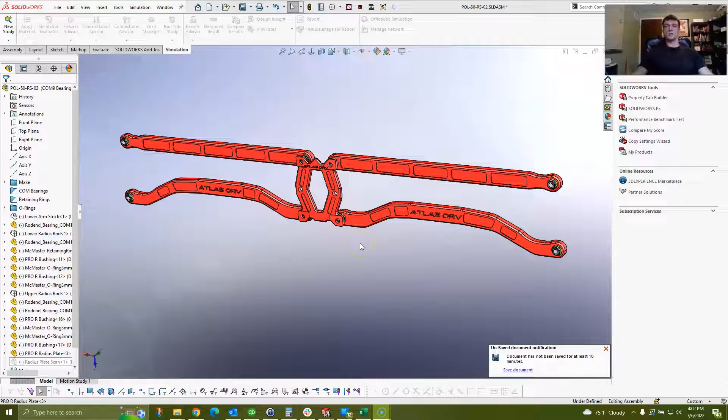Hello, my name is Calvin with Atlas ORV, and in this video I'm going to go over a little bit more about the design process and focus in a little bit more on an area that has some issues, because you have to get kind of thin to fit a larger bearing into the arm and then also fit that arm into the bearing carrier on the machine.

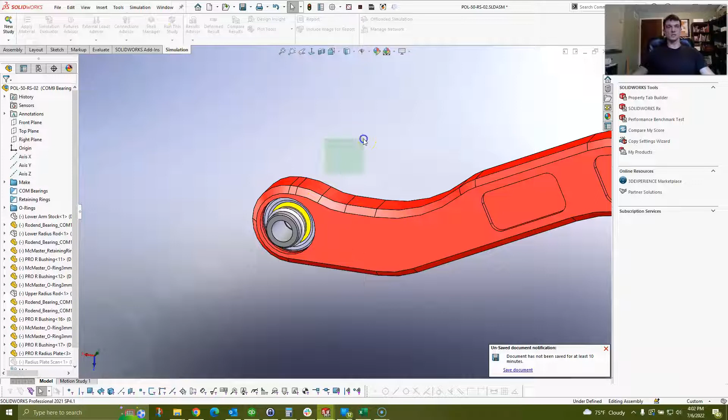So what I'm going to do is I'm actually going to cut the rest of this arm away and I'm going to focus just on this bit of the arm. And I've already done that. Again, this is 7075, that's what we make our rods out of. And I've also done it for 6061 to kind of show the benefits of 7075 over 6061.

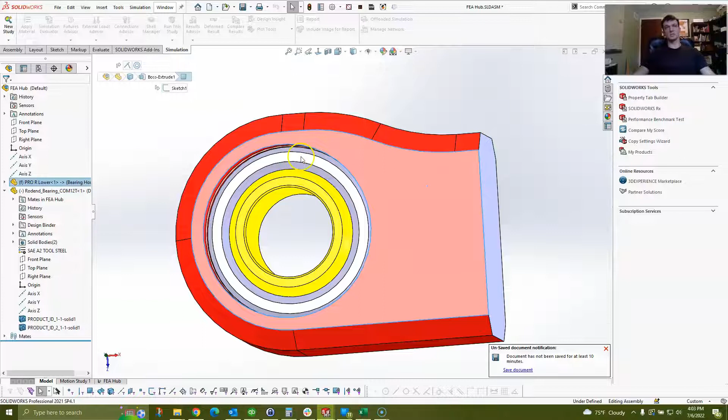So what I did here is I made an assembly, and I have the arm that I cut the end off of, and then I added a COM12 bearing, and this is hardened steel. So what I did for the finite element analysis is I said that this bearing is not going to flex. And that's a good assumption to make because it is hardened steel and it is much harder even than 7075.

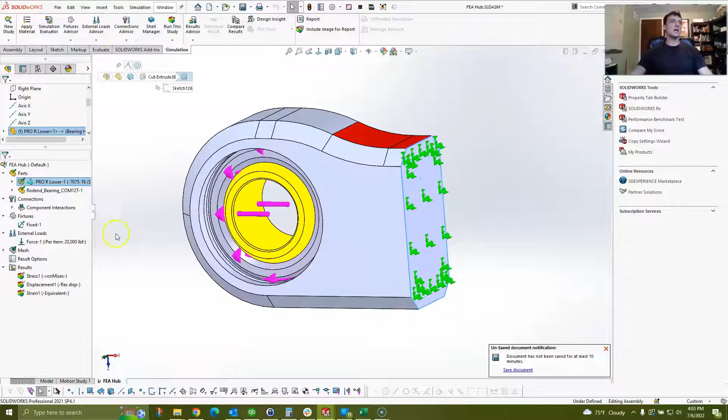So what I did was I created a fixture here, so I fixed this end of the part here so that's not going to move, and then I created a 20,000 pound load on this half of the inner part of the rod to kind of mimic what that would see when you're pulling on it, and ran that simulation.

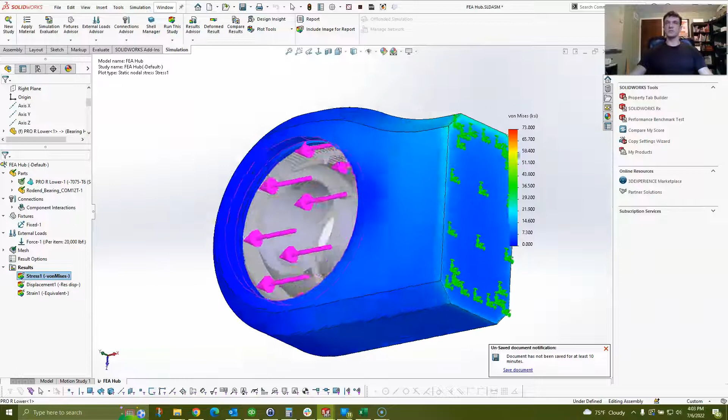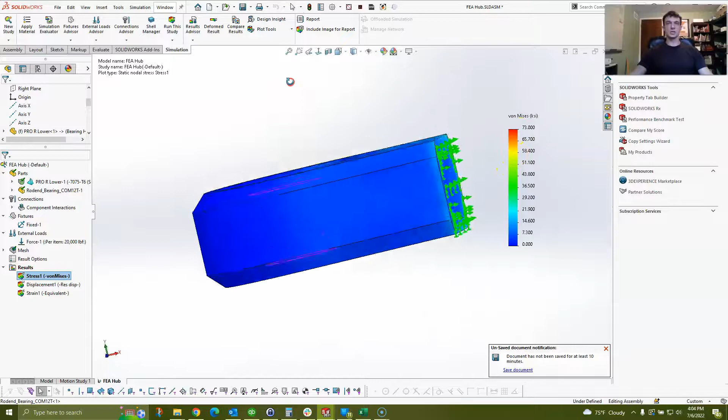You can see a stress map here, and I'm getting a lot of good colors here. So even with 20,000 pounds of force, you can see here that I'm starting to approach into green. I got a tiny bit of yellow, maybe right about here. So I'm pretty comfortable with that. You can see my legend over here. I'm still within the yield strength of this material, which is 73,000 psi. And this is a good load that I'm comfortable saying we can handle.

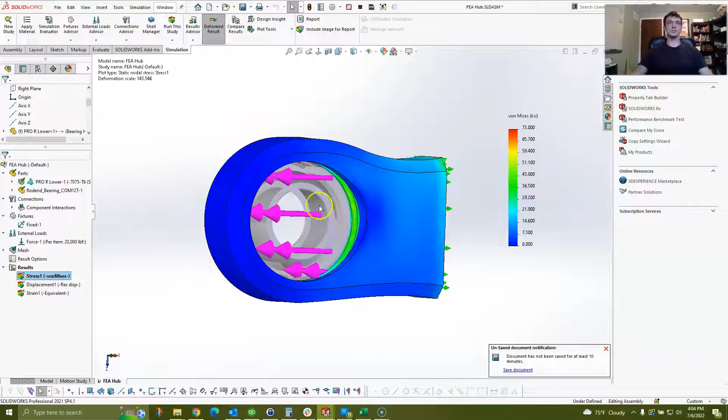And then one other cool thing that I can do with FEA is I can actually show what this part would look like deformed. So I'm going to go up here and I'm going to say deformed results, and I can see where this part is going to deform. Now it's not saying this is failing, it's just when you stretch it, this is what it looks like. And this is also an exaggerated view of what it looks like.

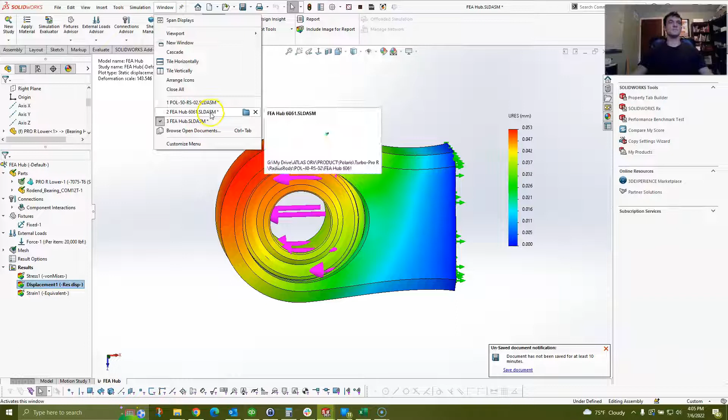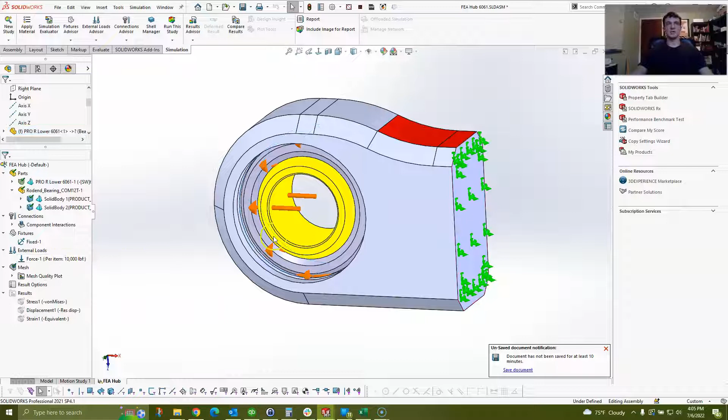Alright, so now I'm going to switch over to 6061, and I did the same exact thing. I said that this bearing is not going to flex. I created a fixture on the end and I put a force on the inner part of the arm here to mimic a pulling load. And I ran this a couple times. I was not able to pull it really past 10,000 pounds, so half of what the 7075 rod can do. And that makes sense because 6061 is half as strong.

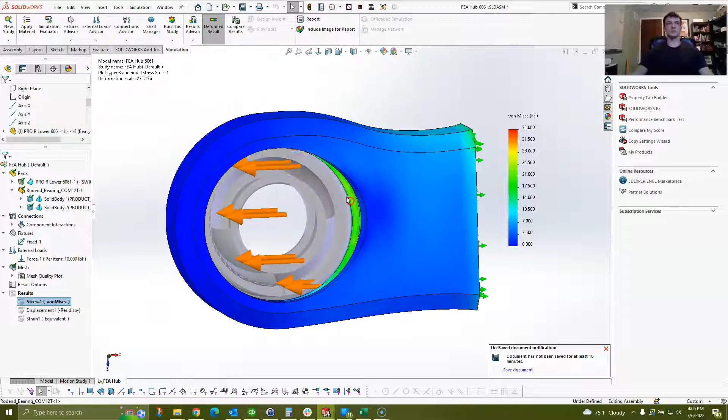So here are the results for that. You can see similar amounts of green and yellow, so it matches that 7075 rod pretty well. But again, we're only able to pull up to 10,000 pounds, and that's actually less than what the entire 7075 rod can handle, which was 12,000 pounds, if you watch my first video on this.

So I hope you learned something about FEA and being able to kind of hone in on a specific area and see what area can handle different loads.